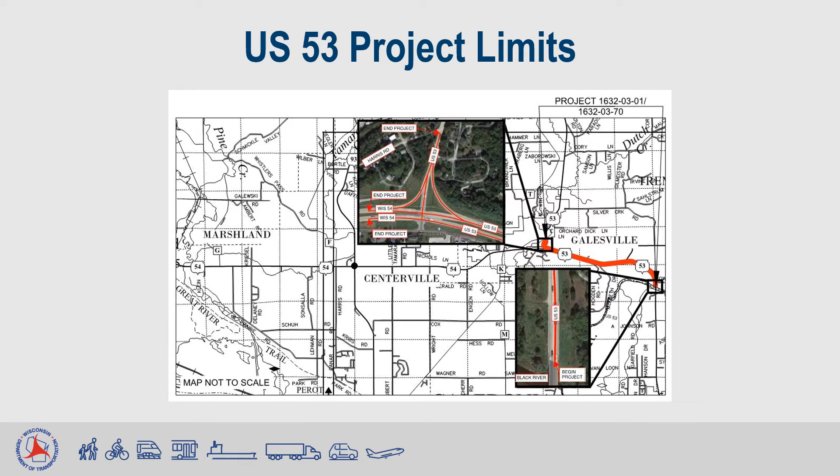The US Highway 53 proposed project begins near the South Trempealeau County line at the end of the Black River Bridge and heads north and then westward for 3.5 miles to Harris Road, located north of the US 53, Wisconsin 54, Wisconsin 93 interchange in the city of Galesville. The proposed project includes the interchange ramps, and a short segment of Wisconsin Highway 54 to Winnebago Road.

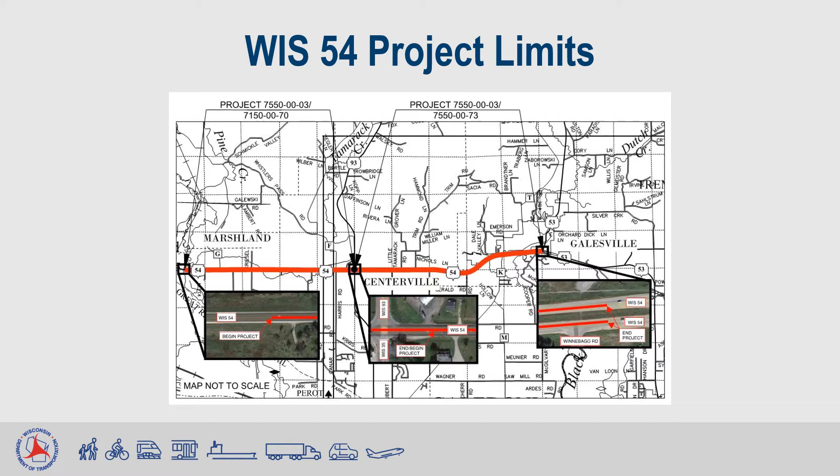The Wisconsin Highway 54 proposed project is separated into two different project segments. The first segment begins near the Buffalo-Trempealeau County line, approximately 650 feet east of the Trempealeau River Bridge East Channel, and heads east for 4.4 miles to approximately 200 feet east of the Wisconsin 35, Wisconsin 54, Wisconsin 93 intersection. The second segment of the Wisconsin Highway 54 project begins at the end of the first segment and heads east 4 miles to Winnebago Road, approximately 500 feet west of the US 53, Wisconsin 54, Wisconsin 93 interchange.

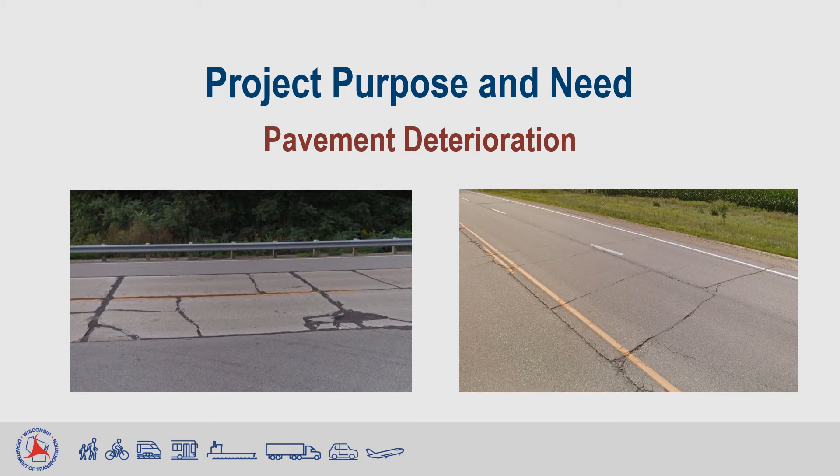The main reason these projects are needed is pavement deterioration along US Highway 53 and Wisconsin Highway 54. The current concrete pavement on US Highway 53 has significant cracking and joint deterioration, while the current asphalt pavement on US Highway 53 has extensive cracking and rutting. The current asphalt pavement on Wisconsin Highway 54 also has extensive cracking and rutting. This pavement deterioration causes poor ride quality, presents safety concerns, and is unsightly.

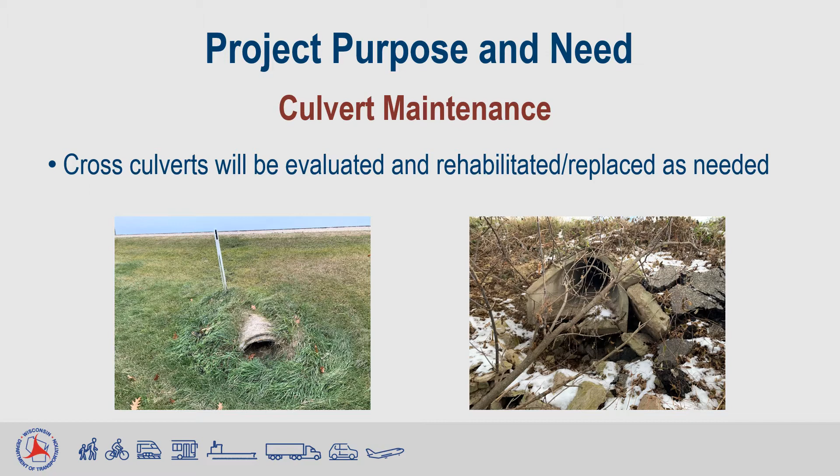Several culvert pipes are also showing signs of deterioration, with many having separated joints, sediment accumulation, and damaged end sections. The deteriorated pipes are not performing as intended, requiring repair or replacement to improve drainage under US Highway 53 and Wisconsin Highway 54. 4 existing reinforced box culverts, 3 along US Highway 53 and 1 along Wisconsin Highway 54, are experiencing joint separation between various sections of the individual box culverts. Separated joints can allow roadway fill material above to be drawn into the box culvert through the joint, potentially creating voids around the box culvert and under the pavement.

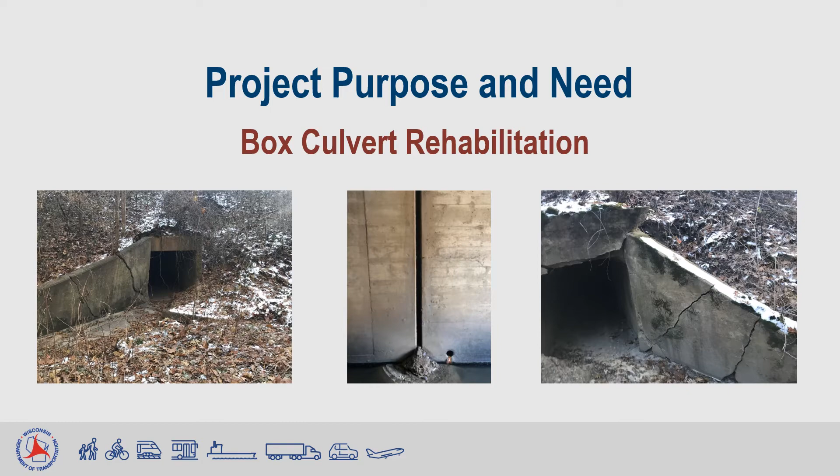2 of the US Highway 53 reinforced box culverts are also experiencing deterioration of the wing walls at different ends of the box culverts. Continued deterioration of the wing walls can potentially lead to failure of the walls and the embankment around the box culvert end.

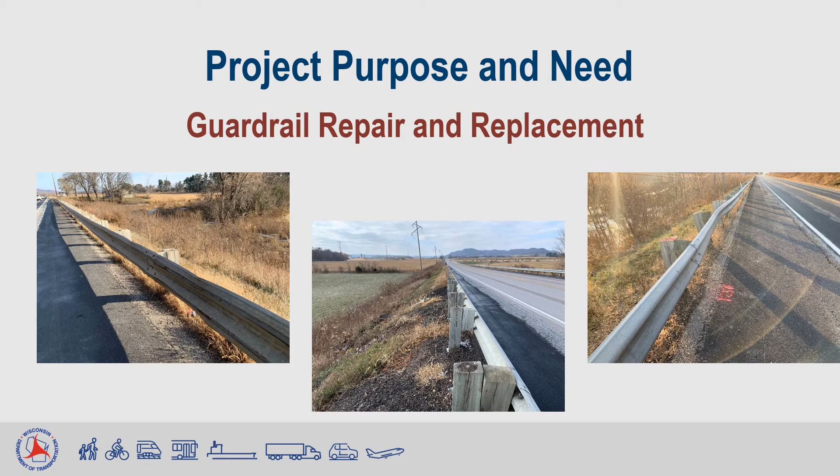The existing guardrail systems protecting the public from roadside hazards are showing evidence of previous vehicle impacts and have damaged components. Erosion is also occurring behind some of the guardrail systems. Lastly, the guardrail systems on Wisconsin Highway 54 are nearing the end of their service lives.

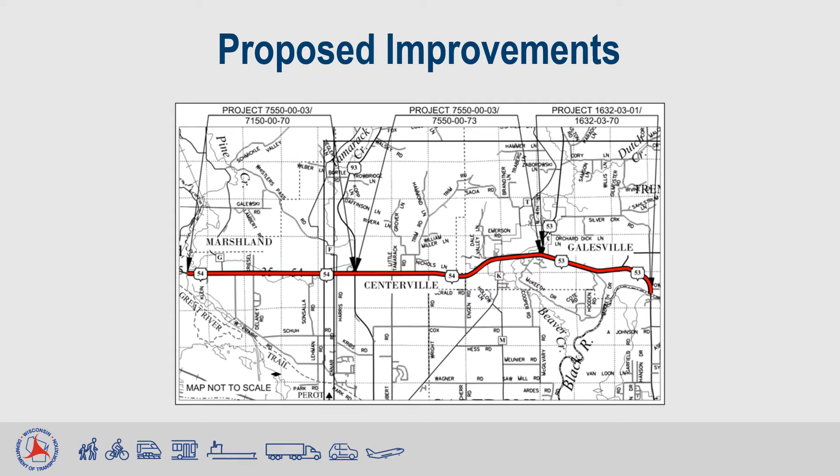The proposed resurfacing improvements for this segment will involve joint patching and some concrete pavement repair prior to overlaying the existing concrete with 4 inches of new hot mix asphalt pavement. The paved portion of the shoulders will be widened to 5 feet. Centerline and shoulder rumble strips will be installed, and shoulder gravel will be replenished.

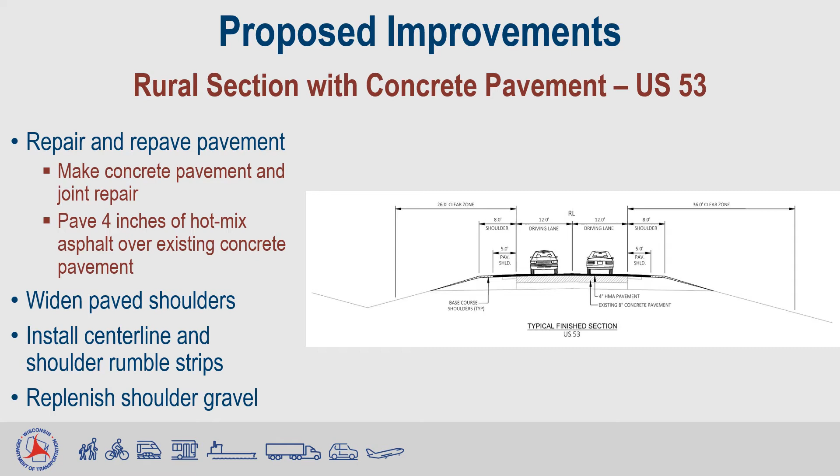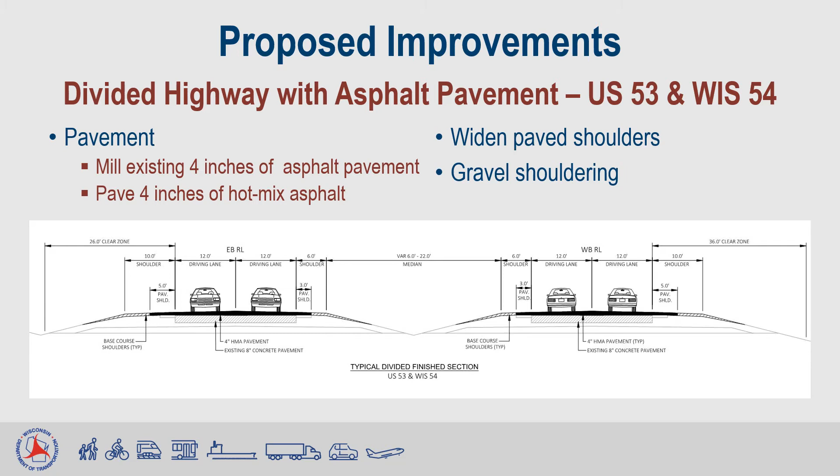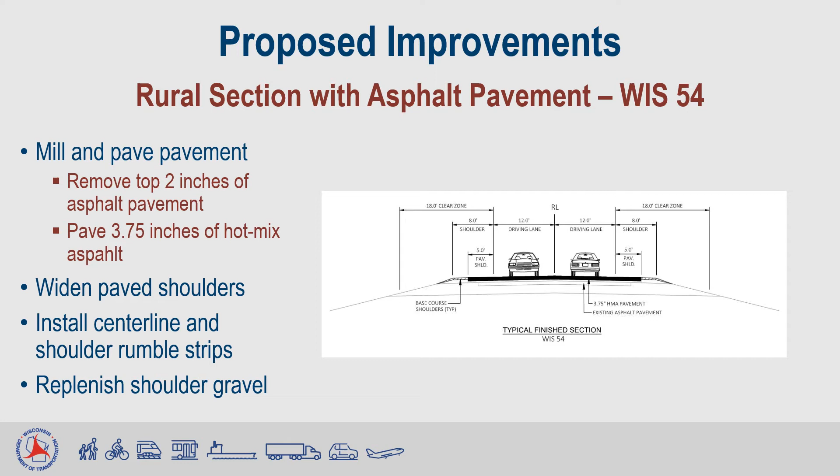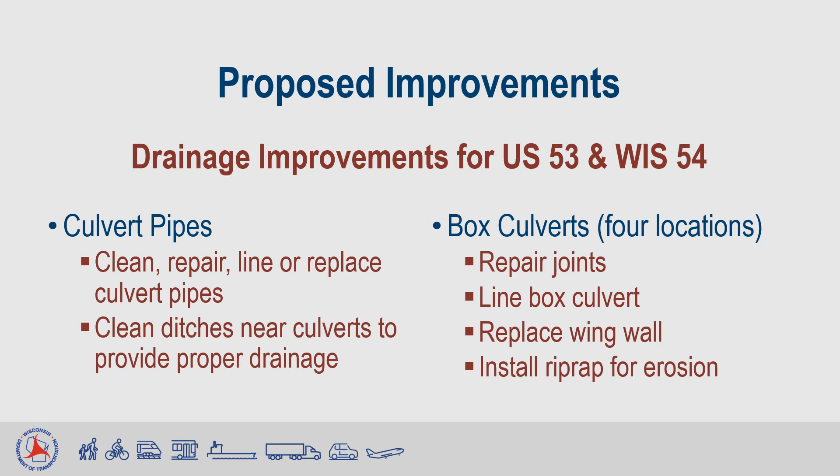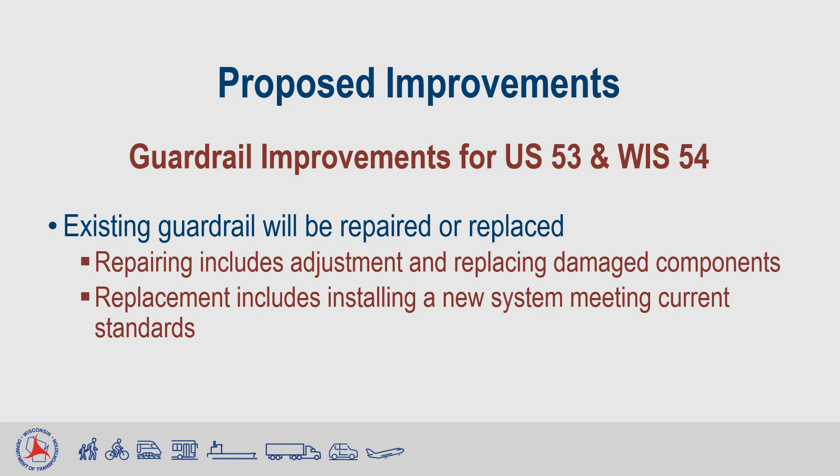Additionally, part of the proposed project improvements includes repairing existing guardrail installations to update the system, or replacing outdated guardrail systems. Repairing an individual system includes adjustment and replacement of damaged components. Replacement will include installing a new system to meet current standards.

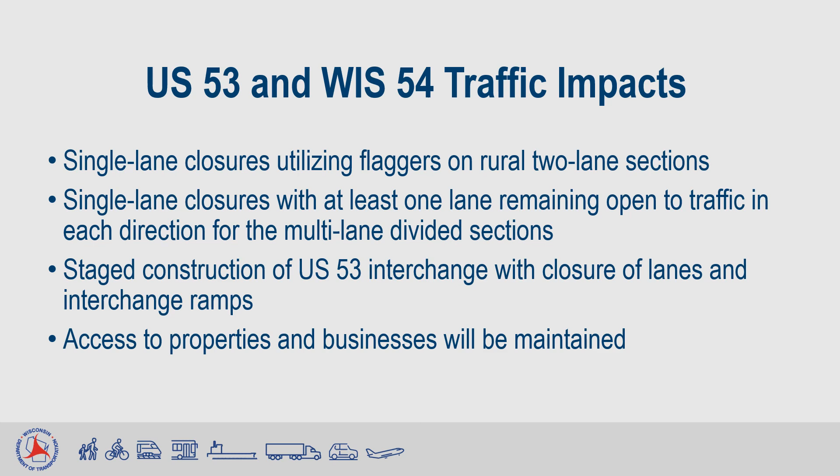Preliminary design began in the fall of 2019. The preliminary design and environmental process is to be completed in June of 2021. Additional right-of-way is anticipated for the project improvements on US Highway 53, which would include permanent limited easements at some of the box culvert structures for erosion control at the structure ends. The right-of-way plat and real estate acquisition for the easements is anticipated to be completed in August and fall of 2021, respectively. The plans for the project currently are on schedule to be finalized by August 2022, and construction is currently scheduled for the 2023 construction season.